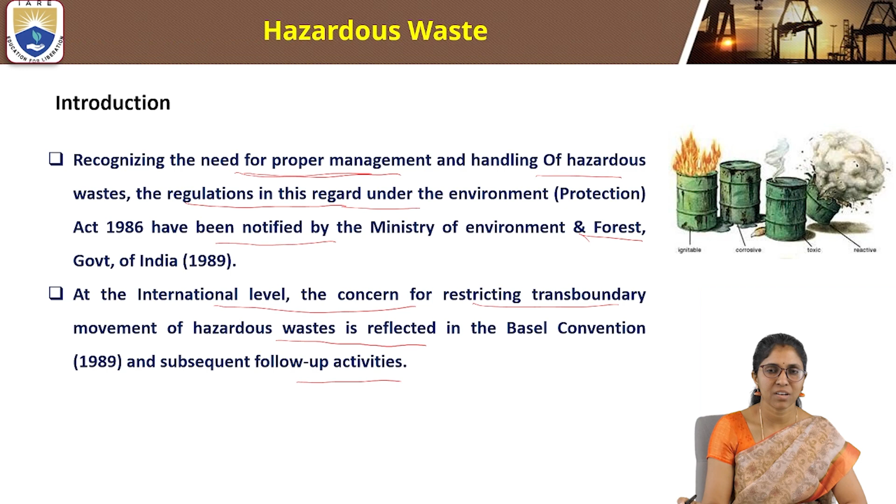At the international level, the concern for restricting transboundary movement of hazardous waste is reflected in the Basel Convention, 1989, with subsequent follow-up activities.

Hazardous waste management in India: in recent years, some important steps have been initiated for hazardous waste management. These are related to harmonization of domestic legislation with the decisions of the Basel Convention.

Programs for setting up hazardous waste treatment and disposal facilities in industrial estates, setting up a national center for cleaner technology and production with subcenters in different states, and coordination with customs and port authorities to ensure strict control over the movement of hazardous waste across international borders and prevention of illegal trafficking.

Strengthening the capability of central and state pollution control boards for regulation, management, and handling of hazardous waste, and setting up a sub-regional training center at New Delhi.

What is the Basel Convention? It is the broadest and most significant international treaty on transboundary movement of hazardous waste management, which is presently in effect.

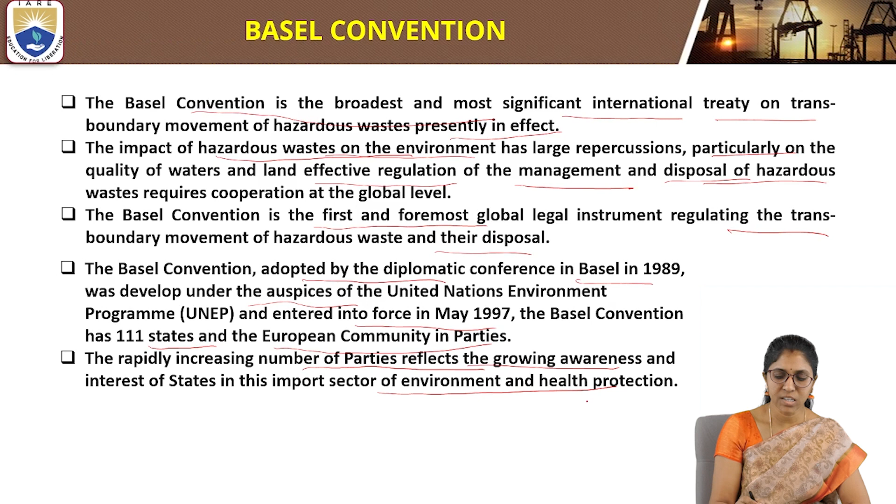The Basel Convention has 111 states and the European Community as parties. The rapidly increasing number of parties reflects the growing awareness and interest of states in this important sector of environmental and health protection.

The following are key objectives of the Basel Convention. The main objective is to reduce transboundary movement of hazardous waste and other waste subject to the Basel Convention to the minimum consistent with environmentally sound management. Second, to dispose of hazardous waste and other waste generated as close as possible to their source of generation.

To minimize the generation of hazardous waste in terms of quantity and hazard potential. To ensure strict control over movement of hazardous waste across borders and prevention of illegal traffic. To prohibit shipments of hazardous waste to countries lacking legal, administrative and technical capacity to manage and dispose of them in an environmentally sound manner, and to assist developing countries and countries with economies in transition in environmentally sound management of the hazardous waste they generate.

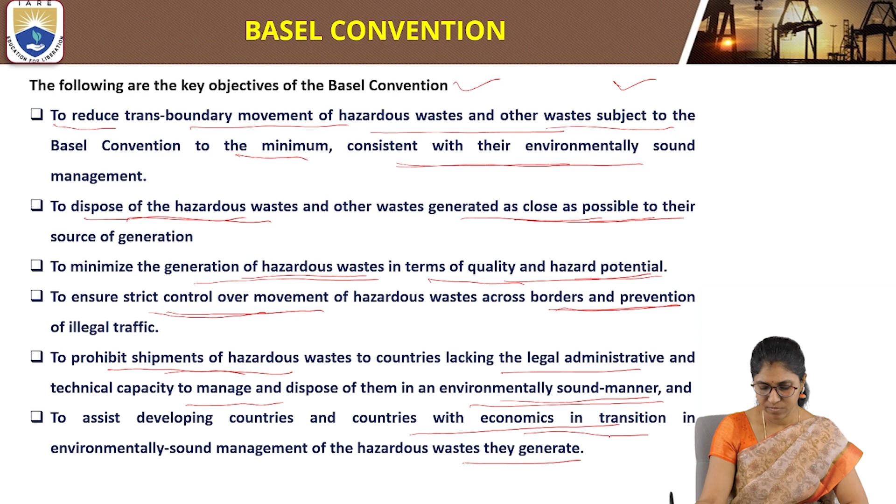Regarding the basic approach in hazardous waste management, the Government of India promulgated the Hazardous Waste Rules in 1989 through the Ministry of Environment and Forest, MOEF, under the aegis of the Environment Act 1986.

Under the Hazardous Waste Management and Handling Rules, hazardous waste is divided into 18 categories. Moreover, the roles and responsibilities of the waste generator, state or central pollution control boards, and state government are clearly defined. However, the selection of a suitable site for effective functioning of a TSDF is a key aspect, and it depends upon several factors such as waste characteristics, site characteristics, public acceptance, and prevailing laws and regulations.

The facility siting should also incorporate the protection of human health, environment, and property values in a community. Though selection of an ideal site conforming with the above factors is a difficult task, few guidelines are available in India for selection of the best site for this purpose. In India, unauthorized dumping of hazardous waste is, however, continuing, and in most places, hazardous waste is being used to fill low-lying areas, which is not acceptable.

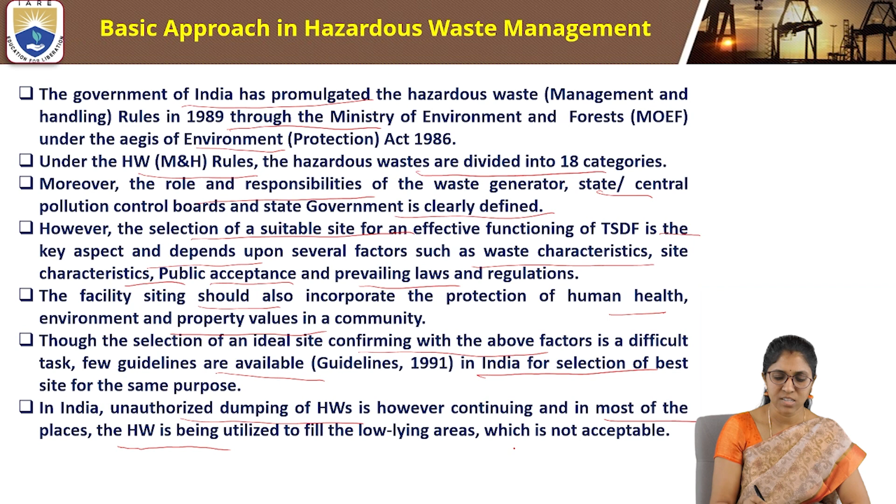Here are the categories of hazardous waste. Cyanide waste: the regulatory quantity is 1 kg per year as cyanide. Metal finishing waste: 10 kg per year, the sum of the specified substances calculated as pure metal. Waste containing water-soluble chemical compounds of lead, copper, zinc, chromium, nickel, selenium, barium, and antimony: 10 kg per year.

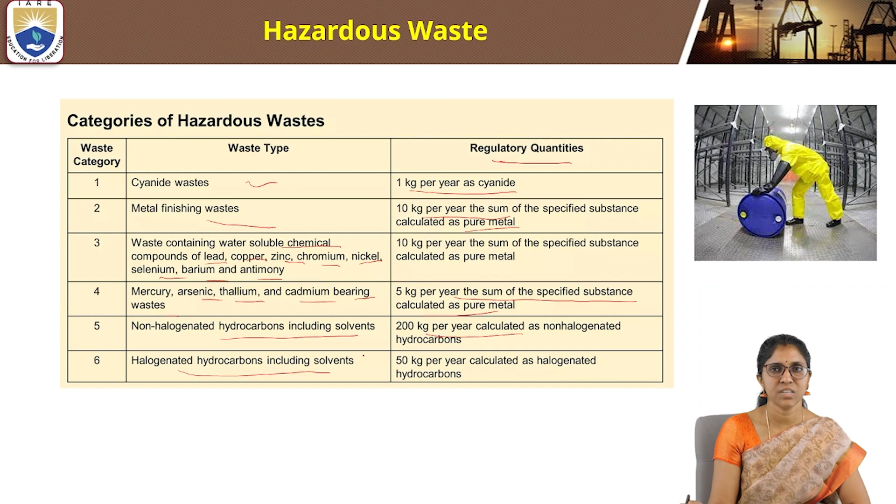Mercury, arsenic, thallium, cadmium-bearing waste: 5 kg per year, sum of the specified substances calculated as pure metal. Non-halogenated hydrocarbons, including solvents: 200 kg per year. Halogenated hydrocarbons, including solvents: 50 kg per year, calculated as halogenated hydrocarbons.

The seventh waste type is waste from paints, pigments, glue, varnish, and printing ink. The regulatory quantity for this is 250 kg per year, calculated as oil or oil emulsions.

Waste from dyes and dye intermediates containing inorganic chemical compounds has a regulatory quantity of 200 kg per year. Waste from dyes and dye intermediates containing organic chemical compounds is 50 kg per year.

Waste oil and oil emulsions are 1000 kg per year. Tarry waste, also from refining and tar residues from distillation or pyrolytic treatment, is 200 kg per year.

Off-specification and discarded products, irrespective of any quantity, along with discarded containers and container liners of hazardous and toxic waste, have regulatory quantities set as irrespective of any quantity. So these are the types of waste and their regulatory quantities.

Hazardous waste management in India. Here we discuss the essential elements of hazardous waste management.

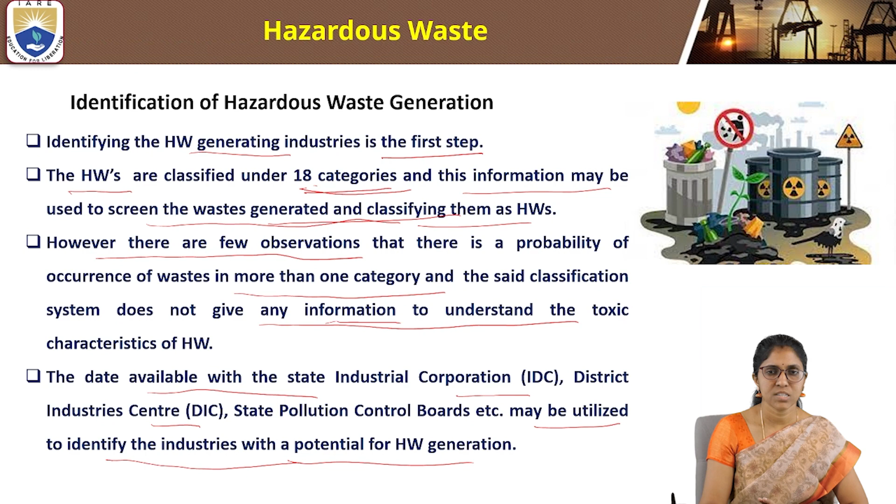The second step is data collection. After identifying the hazardous waste generating sources, the inventory of data pertaining to hazardous waste generation can be developed by conducting surveys through specially prepared questionnaires to each of the identified sources.

Questionnaires are prepared for each of the identified industries and sources. This should be followed by field visits for data verification.

It is essential that the data obtained is verified from secondary data, meaning either published data or data available for another industry producing similar products.

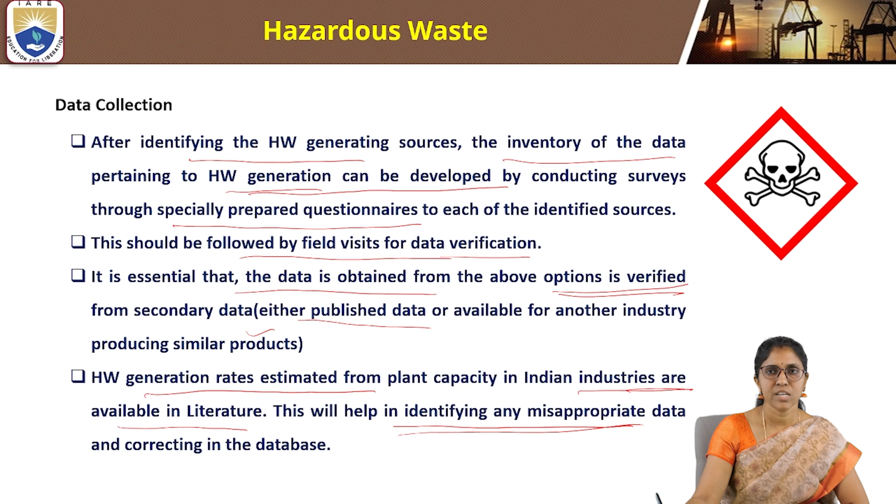Hazardous waste generation rates estimated from plant capacity in Indian industries are available in literature. These will help in identifying any misappropriate data and correcting the database.

The next step is waste characterization. After identifying the hazardous waste, we have to characterize it using different techniques. The hazardous waste generated from the study region should be characterized.

The hazardous waste generated from the study region, that is the industry region, should be characterized. For this purpose, it is advisable that samples may be collected from the waste generation source and analyzed in the laboratory.

The sample collected from the waste generation sources is analyzed in the laboratory. Literature data may be used in the absence of primary data. If primary data is not available, we have to use secondary data, that is literature data.

Detailed information of hazardous waste characterization pertaining to physical, chemical and general characteristics is required, along with properties pertaining to ignitability, corrosivity, reactivity, and toxicity. These characteristics are characterized in waste characterization in the laboratory.

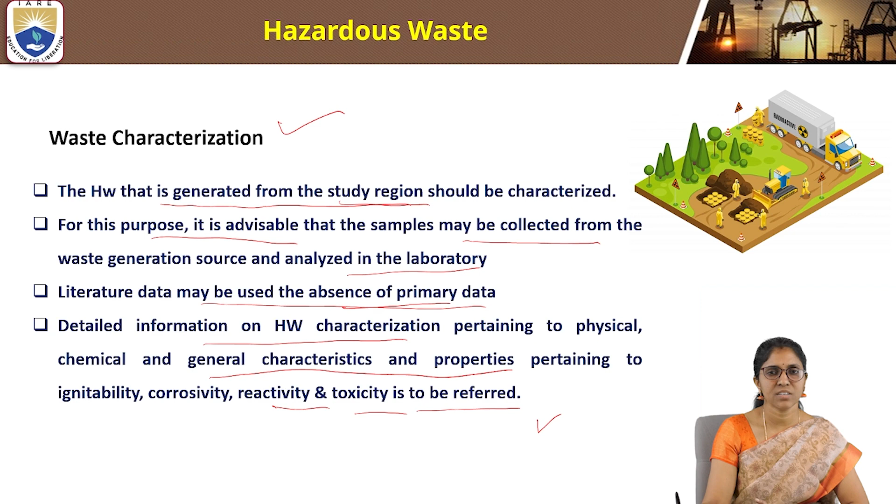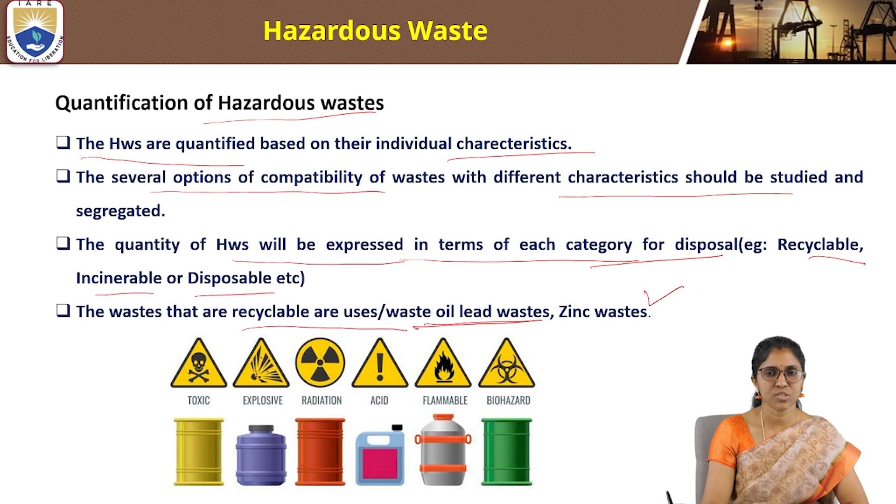So the waste that are recyclable and useful are, for example, waste oil, lead waste, and zinc waste. The quantity of hazardous waste will be expressed in terms of each category for disposal.

For disposal, after identification of quantity, we have to identify the sites for disposal. After quantifying the hazardous waste and assessing the probable area and requirements for its treatment, we have to dispose of the hazardous waste at a site.

After quantifying the hazardous waste and assessing the probable area requirements for its treatment, storage and disposal sites are to be identified.

For this purpose, topo sheets and/or remote sensing images of the study region may be used. The sites are to be physically verified in the field to draw observations pertaining to four different types of attributes.

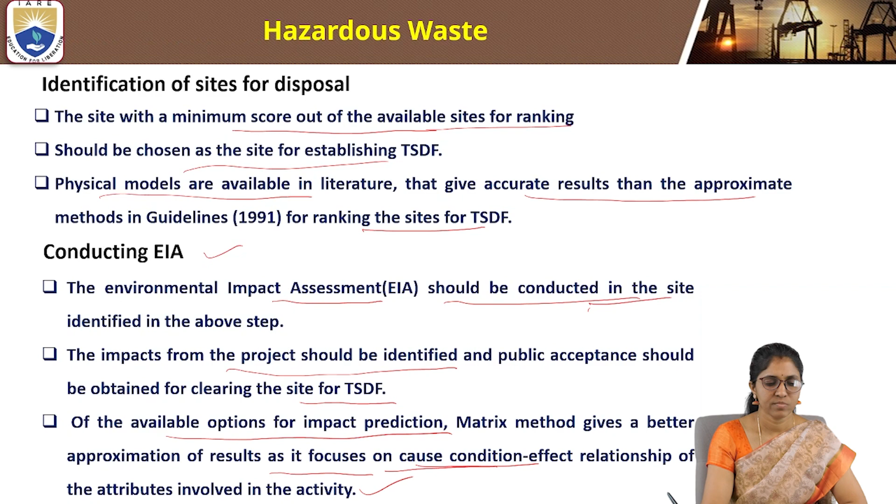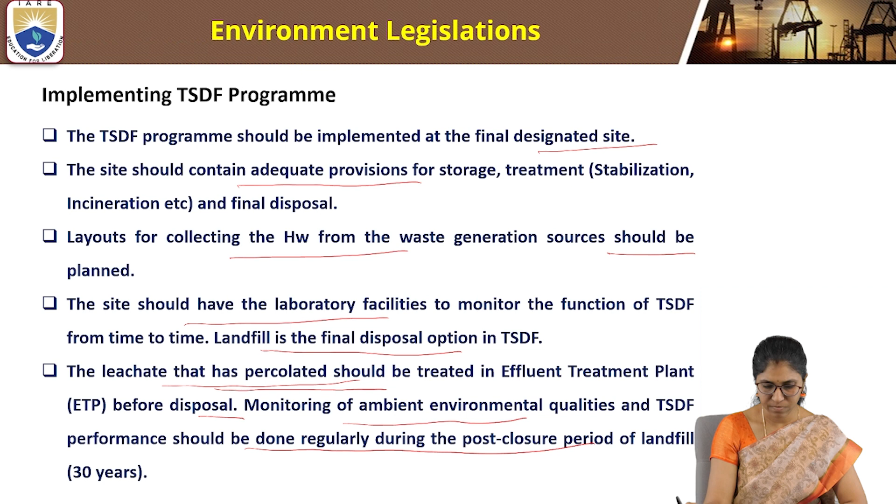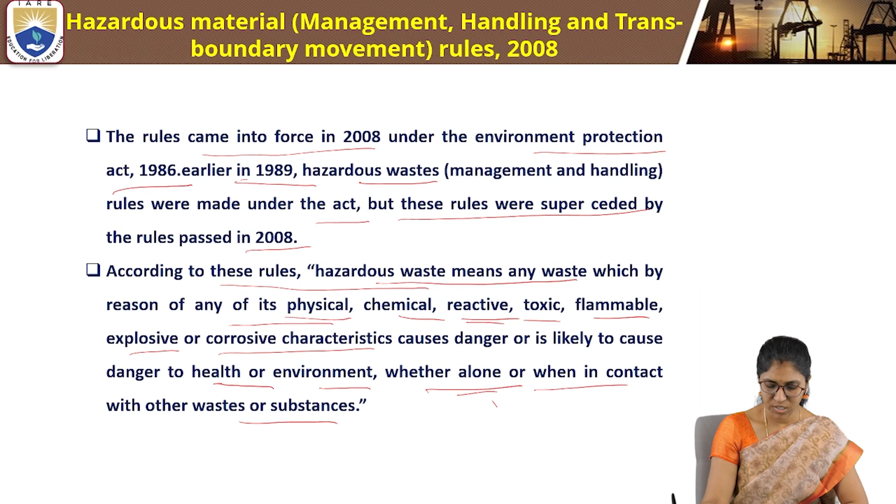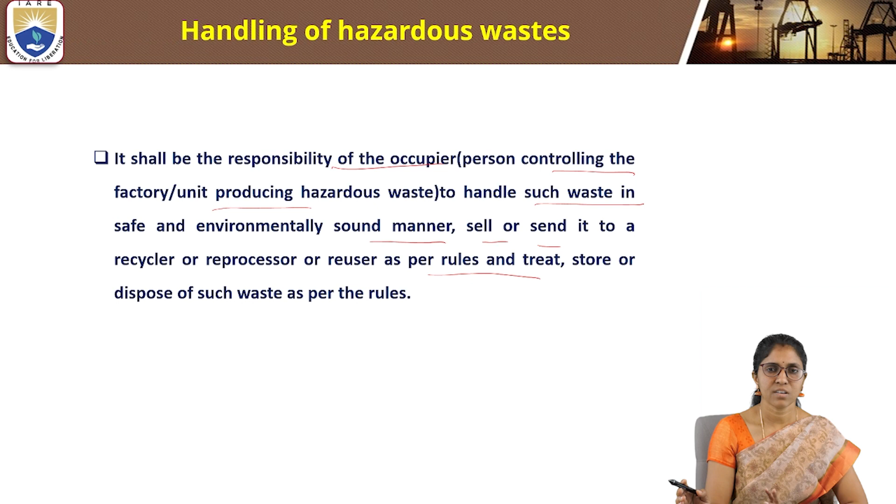Handling of hazardous waste shall be the responsibility of the occupier. Occupier means a person controlling the factory or unit producing hazardous waste. It shall be the responsibility of the occupier to handle such hazardous waste in a safe and environmentally sound manner, and to sell or send it to a recycler, reprocessor, or reuser as per the rules, and to treat, store, or dispose of such waste as per the rules.

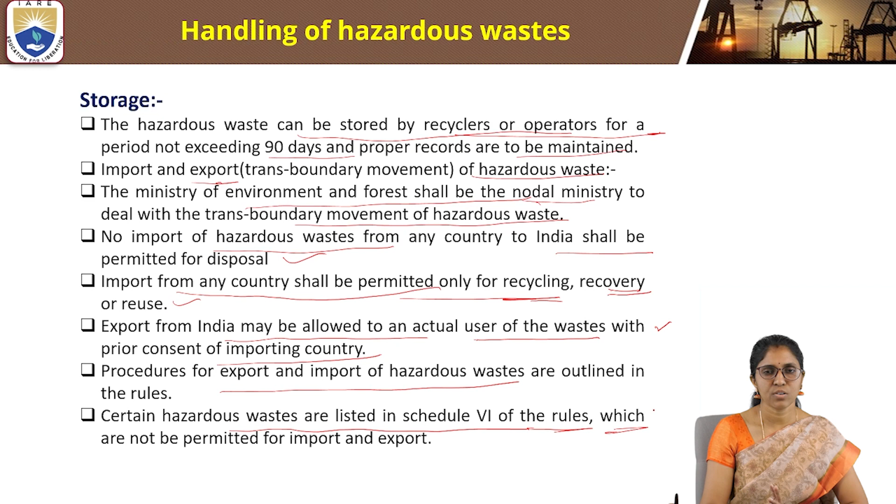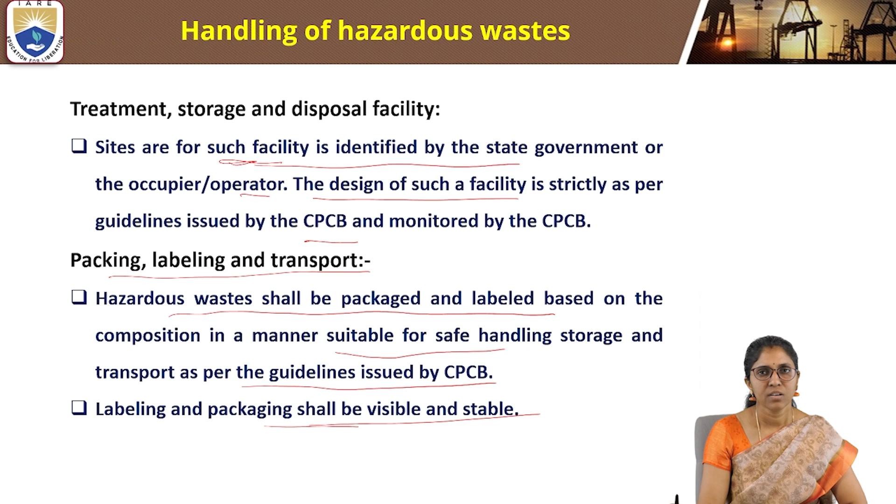Labeling and packaging of hazardous waste shall be visible and stable.

Hazardous Waste Management and Handling Rules 2008, Schedule 1, includes a list of various processes generating hazardous waste. Some important processes are petrochemical process, oil and gas drilling, petroleum refining, primary and secondary production of zinc, copper, lead, production of cadmium, aluminium, arsenic, phenols, asbestos, mineral acids, iron and steel, metal surface treatment, production of caustic soda, solvents, paints, plastics, glue, cements, canvas, textiles, wood preservatives, pharmaceuticals, pesticides, and paper and pulp industry. These are common effluent treatment plants and incinerators.

Some important processes are petrochemical process, oil and gas drilling, petroleum refining. The rules include a list of various processes generating hazardous waste, including all metals listed. We have listed some chemicals: zinc, copper, lead, production of cadmium industries, aluminum, arsenic, phenol, asbestos, mineral acids, etc. These are producing hazardous waste.

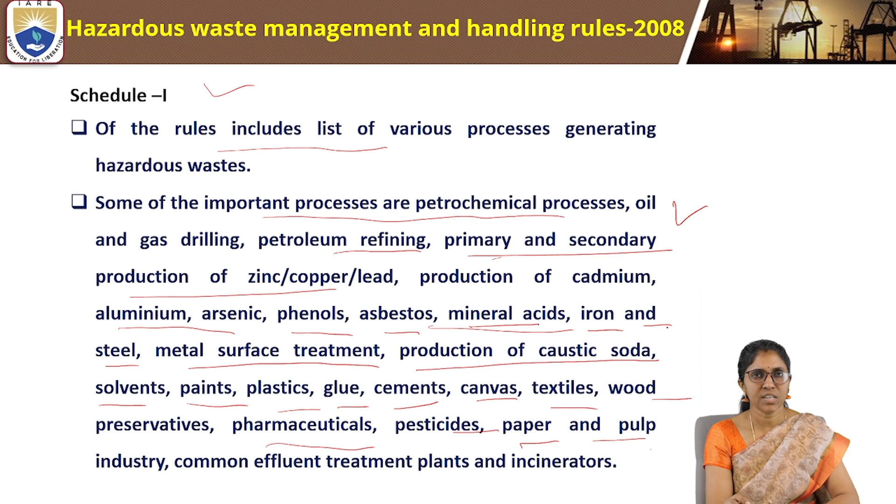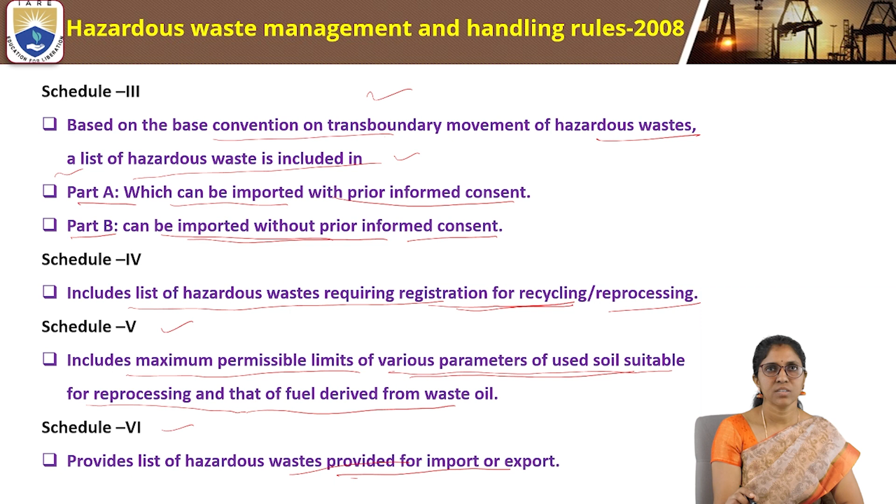Schedule 6 provides a list of hazardous waste provided for import and/or export. These are the Hazardous Waste Management and Handling Rules 2008.